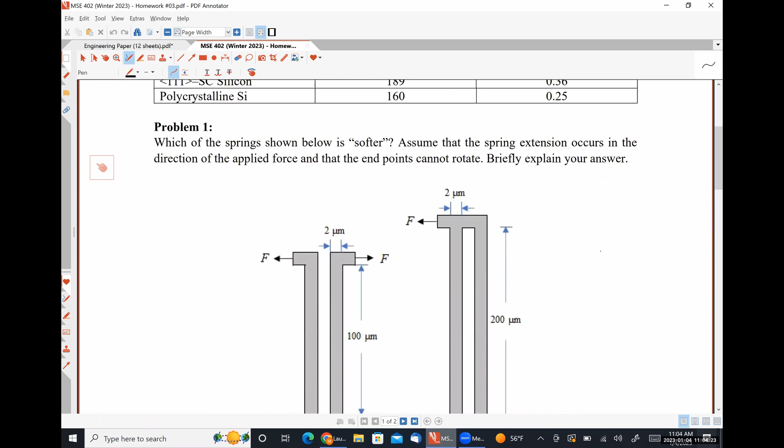Open. MSE 402. Which problem? The first one. Which of the springs is softer? Okay.

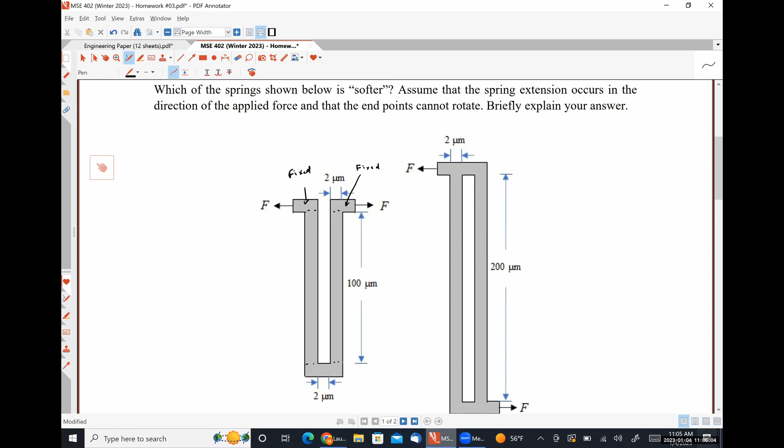So what we have here are, let me write this down. This bit right here is fixed, as is this bit, so we're assuming we have no bending there. And since this bit right here is small, let's consider this whole thing fixed as well. So we have a guided beam part over here and a guided beam part over there. Assuming everything that's thicker, let me pull out my notes for springs here so I can remember how this stuff works, because I haven't thought about it in a couple of weeks.

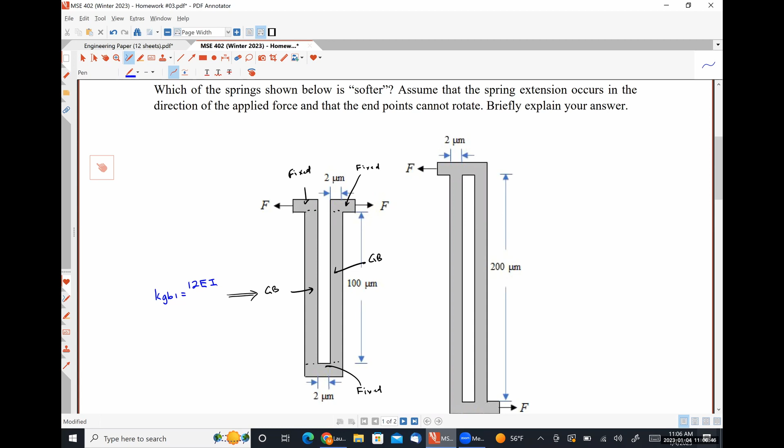Beam. So this section right here is going to have a spring constant KGB, let's just call it 1. That is going to be 12 times the Young's modulus of the material, whatever it is, times I, the moment of inertia, which is dependent effectively on the dimensions of the cross-sectional area.

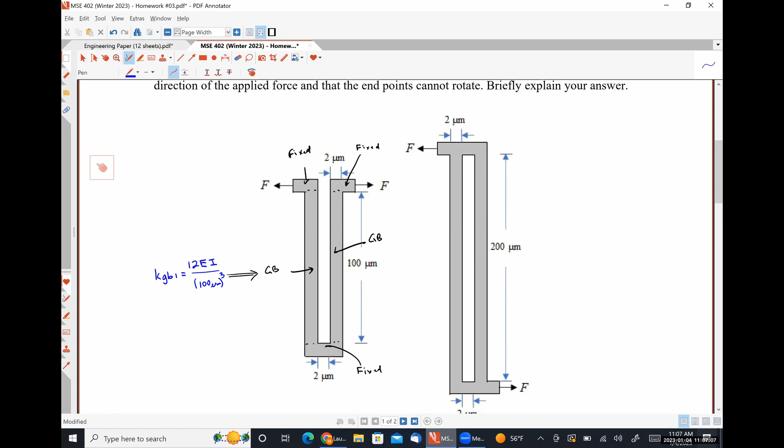So it's going to be whatever it happens to be, divided by the length here, so 100 microns cubed, right? And because we have those two in series, K for spring 1 is going to be 12 EI over 100 microns cubed, all of this times a factor of 1/2, which is going to look like 6 EI over 100 microns cubed.

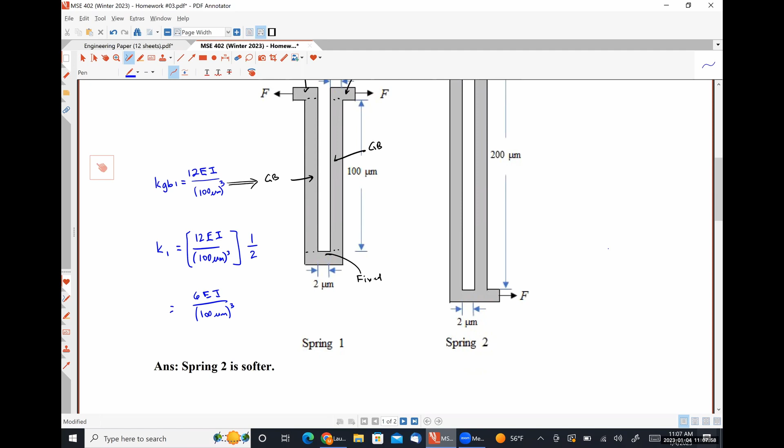Anything seem suspicious or incorrect there? So the right one will be parallel form. Right. So over here, we also have a guided beam thing.

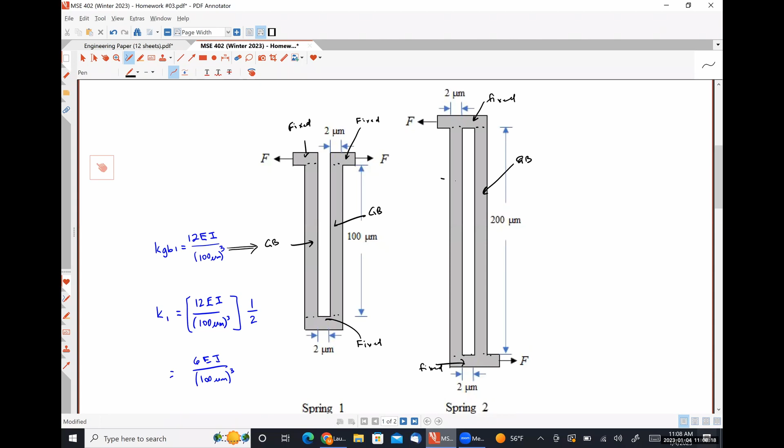So we're considering this part to be fixed, this part to be fixed, and then we have a guided beam bit there and a guided beam bit there. Let's call this KGB2.

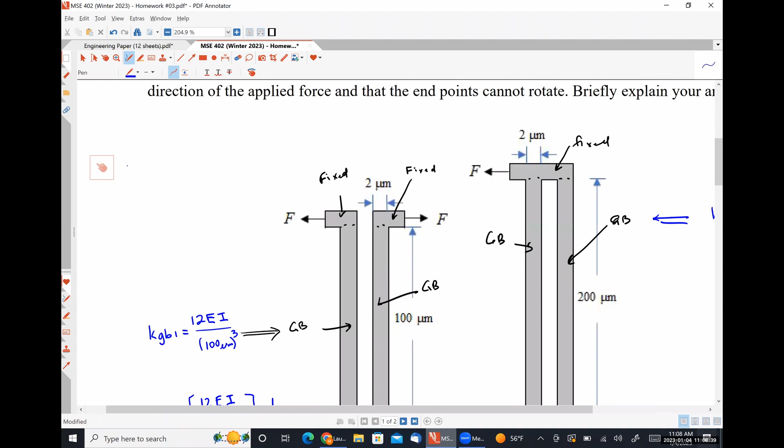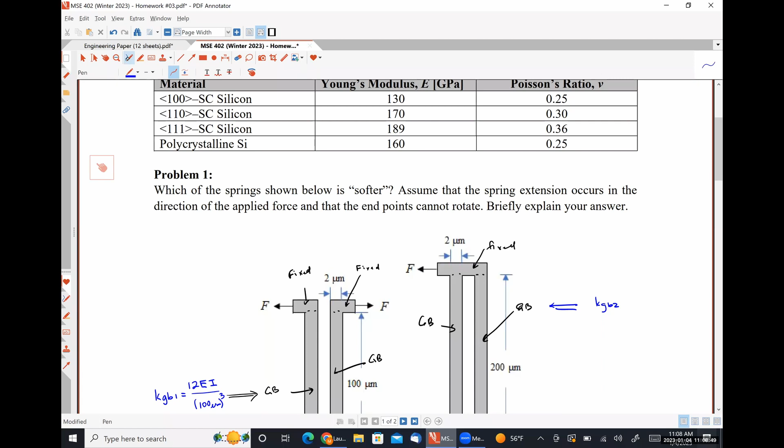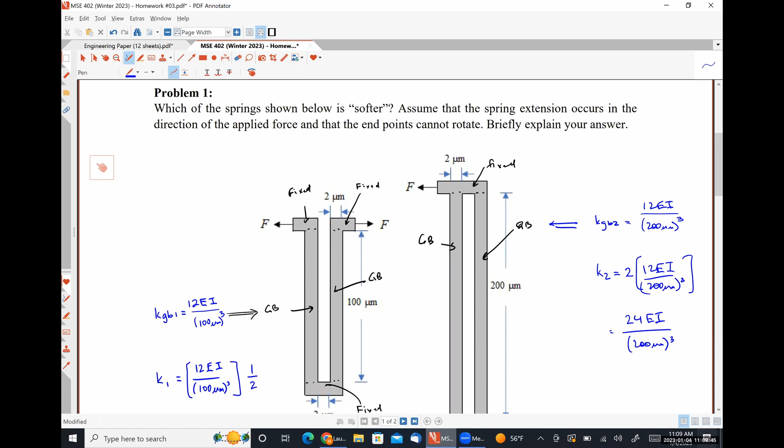Oops, sorry, hold on. This one piece is gonna have 12 EI over this length of 200 cubed. Right? And then there are two of them in parallel. So K2 is gonna be 2 times 12 EI over 200 microns cubed, or 24 EI over 200 microns cubed. And so now we need to compare these two things, right?

So let's just say, yeah, so we're gonna have 1 over 100 microns cubed compared to 4 over 200 microns cubed. Which one is going to be greater than the other? Right, because whichever one is greater is the stiffer of the two springs. Right, so that seems legit.

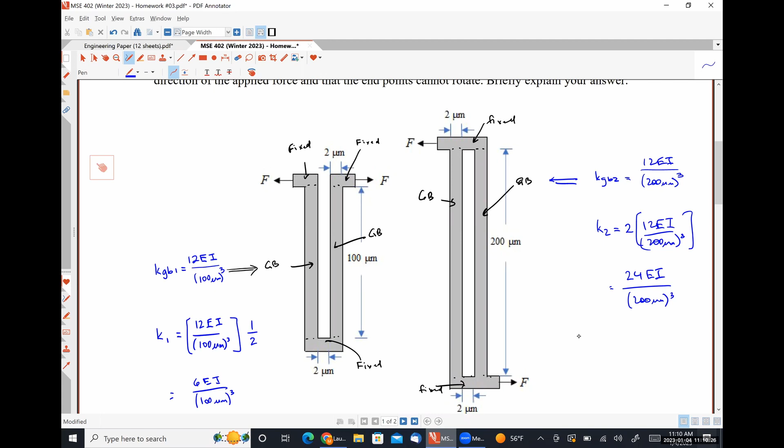For the second question, just one doubt. I have tried all the combinations for the guided beam, but it's like which length to consider, I'm like, do we have a combination of the length or only one length? So why is this picture looking, doesn't this look like this for you guys, right?

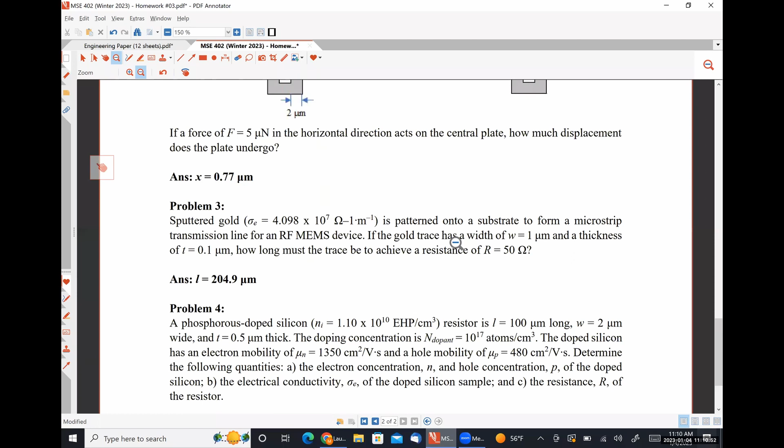Okay, so let me zoom back out. All right, so effectively for this one, between here and here, we have one guided beam spring. Between here and here, we have a second guided beam spring, and those are connected in series. Right? And then there are 4 of those connected in parallel, giving us the total spring constant of the system. That seem legit? That's how I'm looking at it anyway, as an electrical engineer. That's how I see it.

Do you have any other more problems on guided beam for our reference, like with the solution we can do on our own? I mean, I can try to find some, I just made these up.

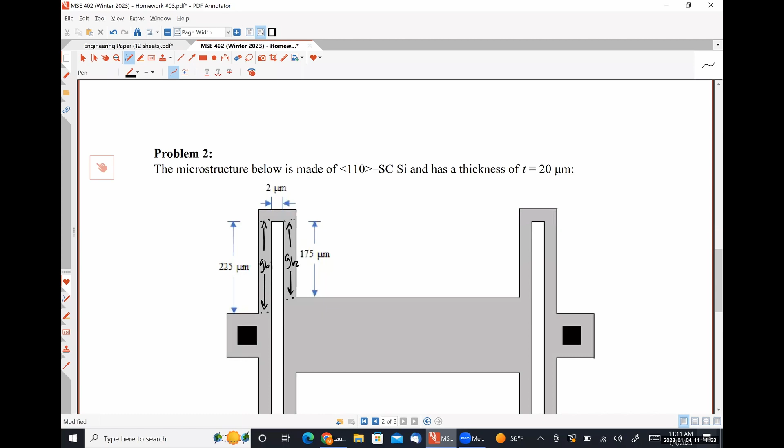But yeah, so that's how I would consider this, I'm considering it a guided beam because I know that this is an anchor point for sure. And I'm considering that this piece is so small effectively that it's not going to easily extend or bend. So whenever I'm thinking of beams as springs, I'm looking for long stretches of things. And in this case, because they have different dimensions, I consider them 2 different guided beam springs connected in series, where again, making the assumption that this part right here isn't allowed to extend or rotate or bend. And then, anything else?

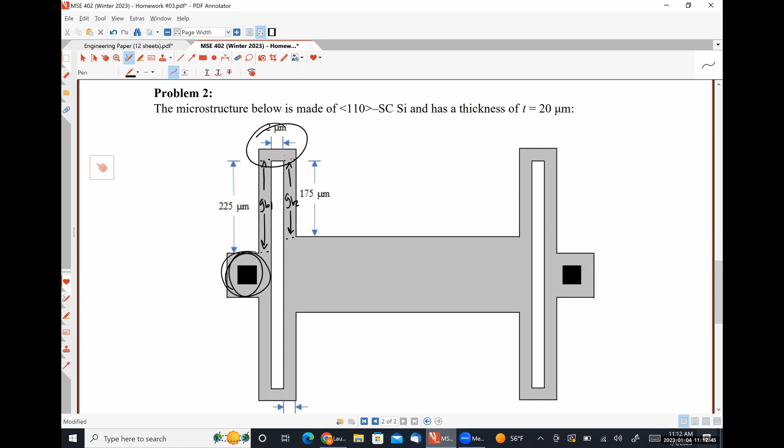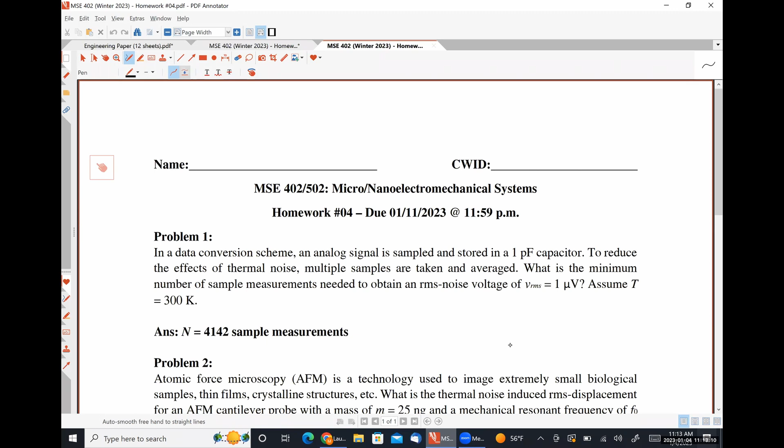For the assignment, problem 2, because RMS 1.024, that's for our Homework 4, let's look. It's been 2 weeks since I've thought about things. So you said problem 4? No, problem 2, problem 2. All right, so let me think about this here.

All right, so we have an AFM system.

We have a mass of 25 nanograms, a mechanical resonant frequency of 20 kilohertz, and we want our noise displacement.

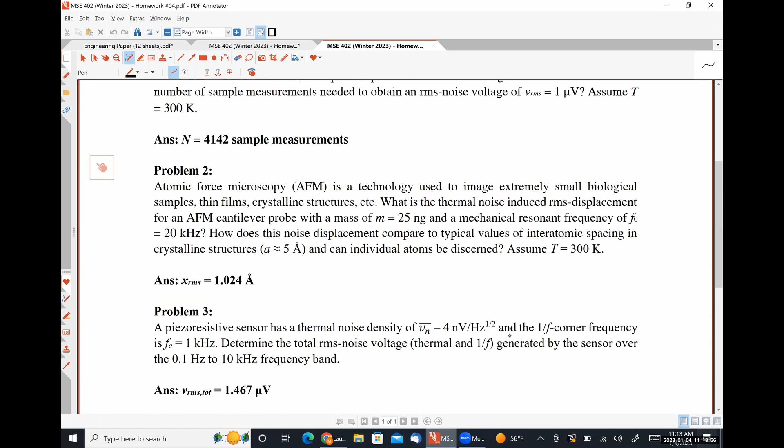So the resonant frequency omega naught is going to be 2 pi times the linear resonant frequency. And this is going to be equal to the square root of K over M, right? Or is it M over K?

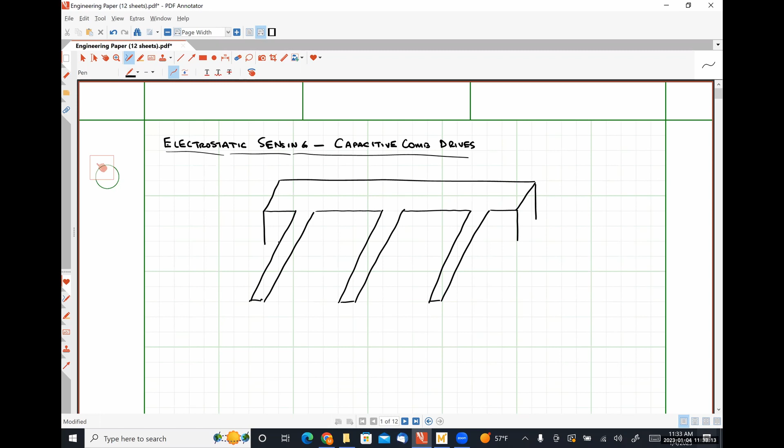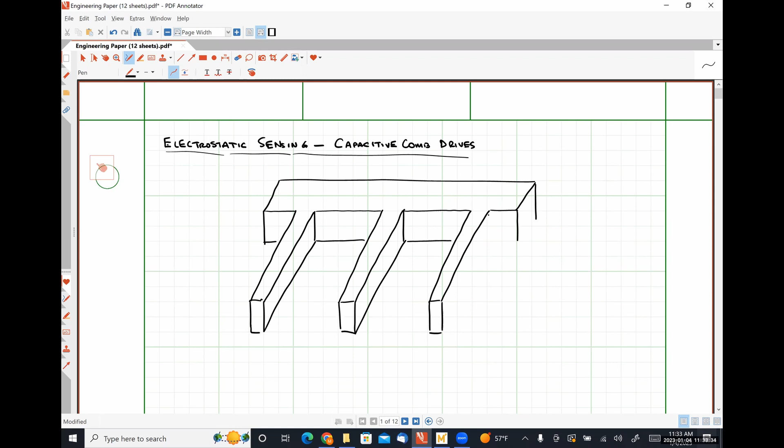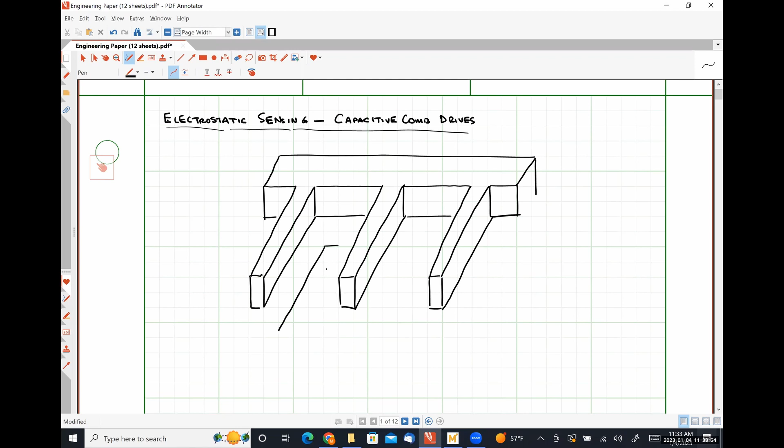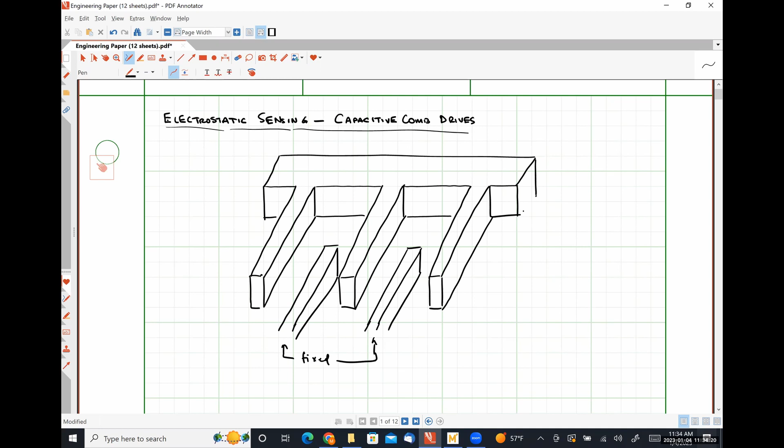All right, so we have this structure here, not quite done yet. We have a series of fingers like so, and in between these guys, let's say that these fingers on bottom are fixed, and this whole structure at the top is movable. Depending on what direction it moves, we have different things.

Let's talk our way through this briefly with some critical dimensions here. Let me do this in a different color, because if everything's in black, it's going to be even more confusing. So we have some separation between these interdigitated fingers, which I'm going to call D naught.

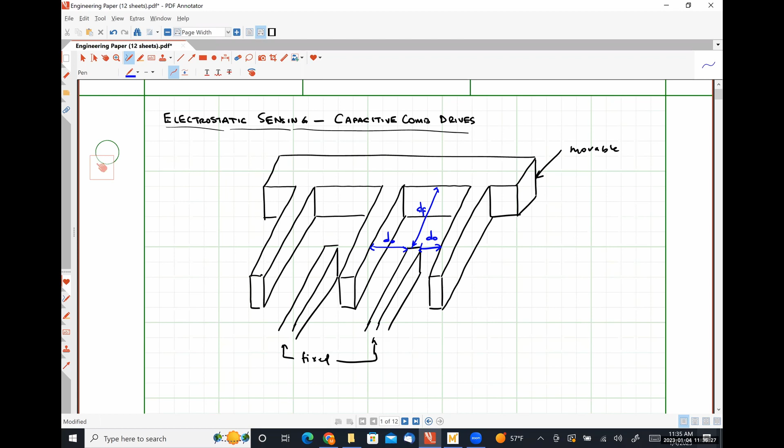Let's say that when our system is at rest, our fixed fingers are directly in the middle of the gaps of our movable fingers, like so. There is also this dimension, which I'm going to call D sub F. We'll talk about that in a moment.

We have this length, which I'm going to call L naught, which represents how much the fingers are overlapping each other. And then we have this distance T naught, that is the thickness of the fingers, where we're assuming that the fixed fingers and the movable fingers have the exact same thickness.

So this structure is composed of interdigitated fingers, more commonly called a comb drive, because it resembles a comb like you would use to comb your hair, because engineers are lazy. We have multiple different capacitances that are formed by this structure.

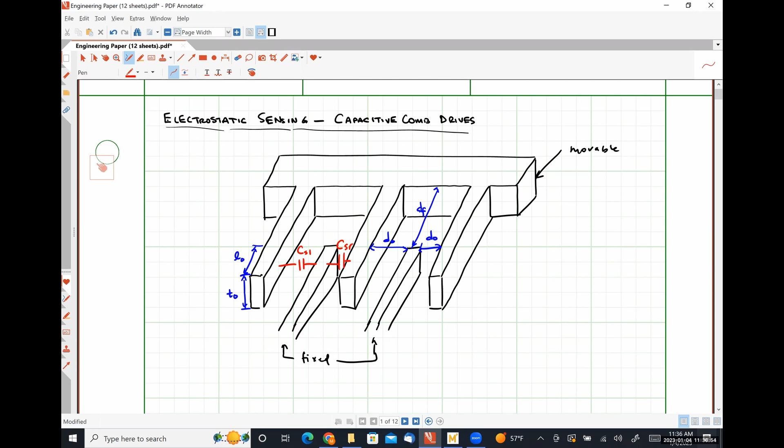For instance, there is a sidewall capacitance formed between the fixed finger and the sidewall of the movable finger to the left. I'm going to call this CSL, or capacitance, S is for sidewall and L is for left. Similarly, we're going to have a capacitance here, CSR, between our right sidewall of our fixed finger and the sidewall of the movable finger to the right.

And then we also have a capacitance here that is a fringe capacitance. We're going to talk a little bit about this fringe capacitance later on. Effectively, it is a parasitic or largely unwanted capacitance. It is very difficult to get a closed form solution for the value of this capacitance, because our parallel plate capacitor equation is really only valid for infinitely large plates, right?

Where we're neglecting some fringing capacitance. Since this fringe capacitance CF is formed by effectively a very small area overlapping something far away, our parallel plate capacitor equation isn't particularly valid there. So we would have to do something like finite element analysis, like computer simulations, in order to figure out what that fringe capacitance is.

For our derivation here, we are going to assume that distance D sub F is large, such that that fringe capacitance is small. If the area of overlap is small and the distance is large, that fringe capacitance should be small compared to our designed capacitances. So it exists, but we are going to neglect it.

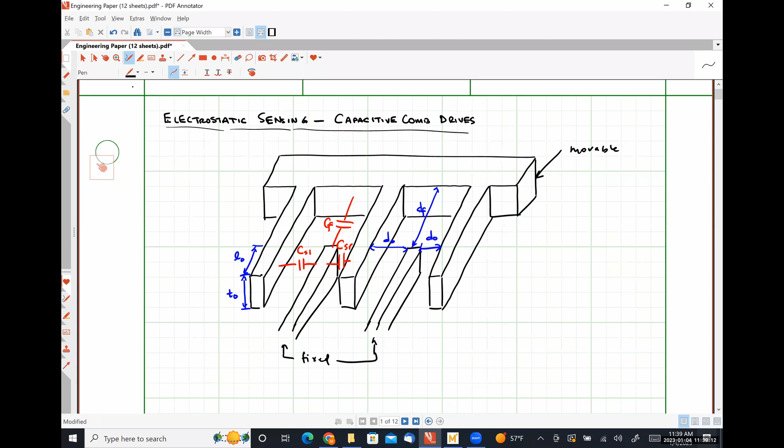Because effectively it can work as a capacitive sensor in a multitude of different ways, we are going to consider 3 different cases. Technically there's a 4th case, but I'm not going to talk about it because the math behind it is annoying. So let's talk about case number 1.

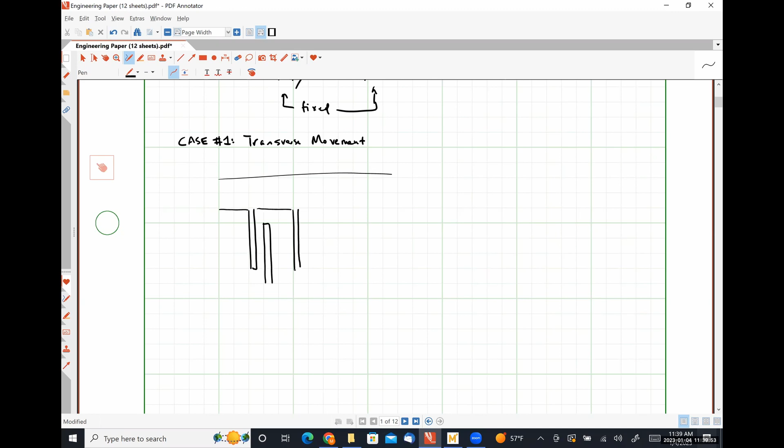Where we have transverse movement, okay? So I'm going to redraw this thing, but from a top-down perspective, pretty simplistic view here. And then I'm going to draw my fingers here, and I'm intentionally not drawing these fingers directly in the middle.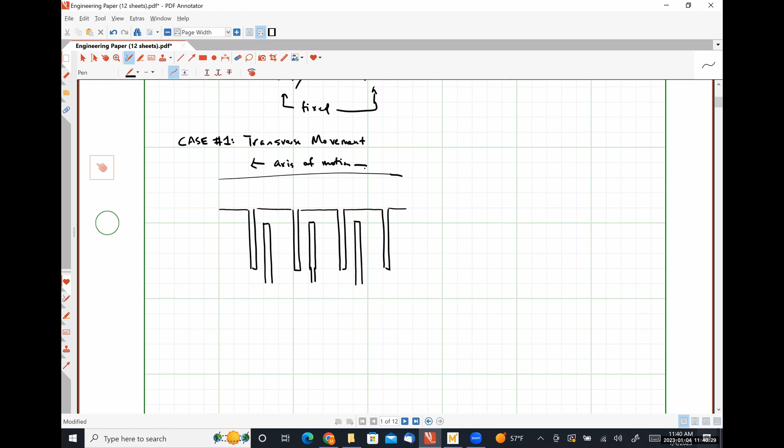Our axis of motion will be from left to right. We have some length of overlap L naught. And then here, we have some distance D naught, which is our rest position, plus X. So our movable system has moved with respect to our fixed system, such that we have a large distance between our stationary finger and the finger to the right, and a small distance here. This one will be D naught minus X, like so.

And then we have a thickness direction into the page. So just for the sake of argument, we're going to call this the Y direction, this the X direction, and our Z direction will be out of the page, okay?

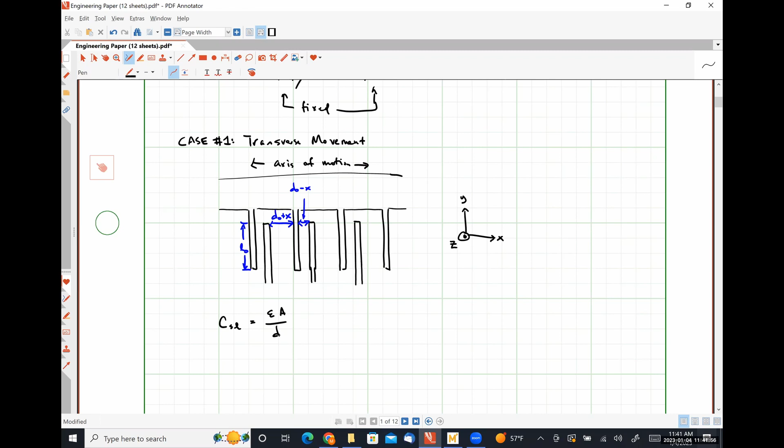So for an individual finger, the capacitance CSL will be given by epsilon times the area over the distance. That is our generic parallel plate capacitor formula. Assuming there is an air gap, this will be epsilon naught. Our area is the length L naught multiplied by the thickness T naught, divided by the distance separating our fingers, where in this case this distance is D naught minus X.

Similarly, CSR will be epsilon A over D. And so this is going to look like epsilon naught, L naught, T naught over D naught plus X.

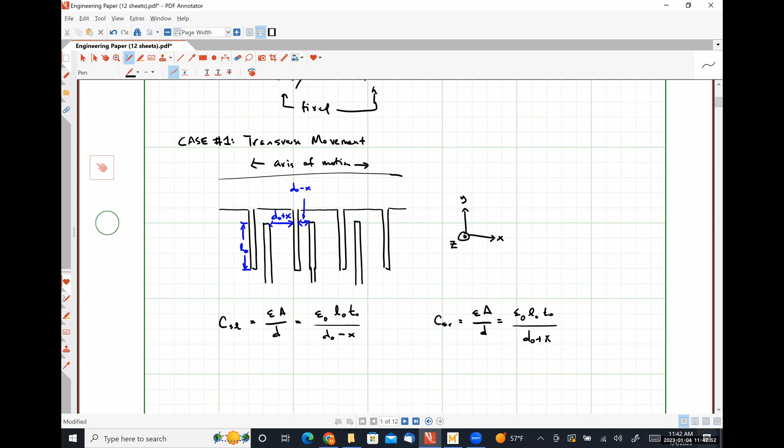Our total capacitance is going to be N times CSL plus CSR, because the number of fingers is going to increase our overall capacitance, since these are going to be effectively connected directly in parallel with each other. So if our movable structure is at one potential and all of our anchored fingers are at a different potential, all of those capacitors formed are connected electrically in parallel with each other.

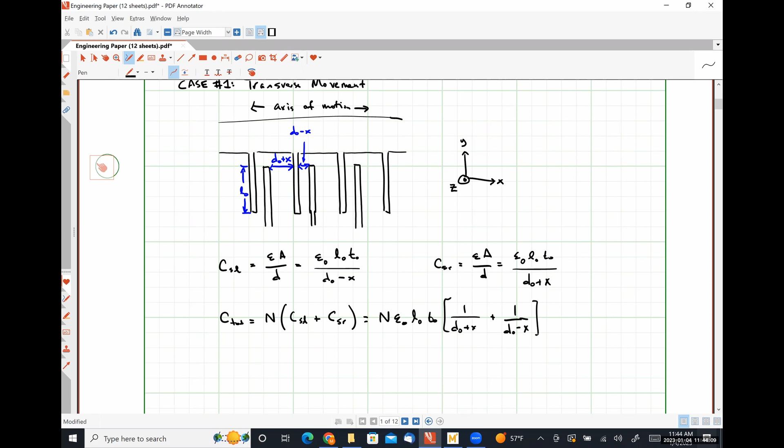And so this gives us an overall capacitance of N epsilon naught L naught T naught times a factor of 1 over D naught plus X plus 1 over D naught minus X. And we can also define what's called a sensitivity.

This is the change in capacitance with respect to the change in displacement. And I'm not going to force you guys to do the derivative. It's going to be 1 over D naught minus X quantity squared, minus 1 over D naught plus X quantity squared.

So from this, we can actually see a couple of advantages we might have by using this type of structure over a simple plate moving into or out of the axis. This is a surface micro machine process inherently, which means it's largely compatible with CMOS processes. We're just doing everything on top of an already established wafer, so we can easily integrate other circuitry with a structure like this.

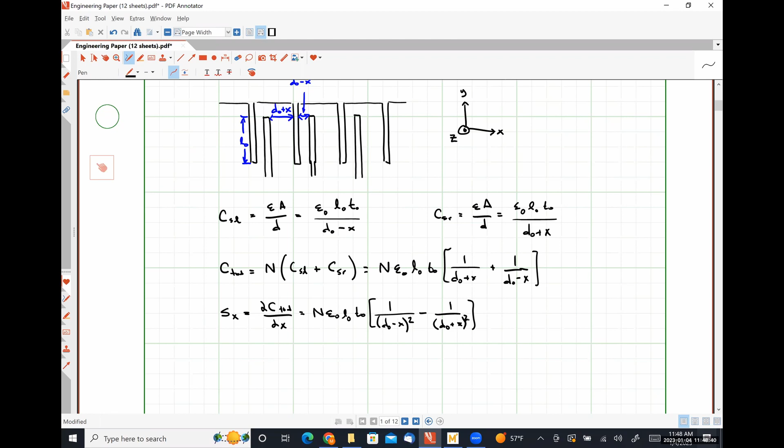Now let's talk about how we can actually do area tuning with a system, okay? So our second case is going to be lateral movement.

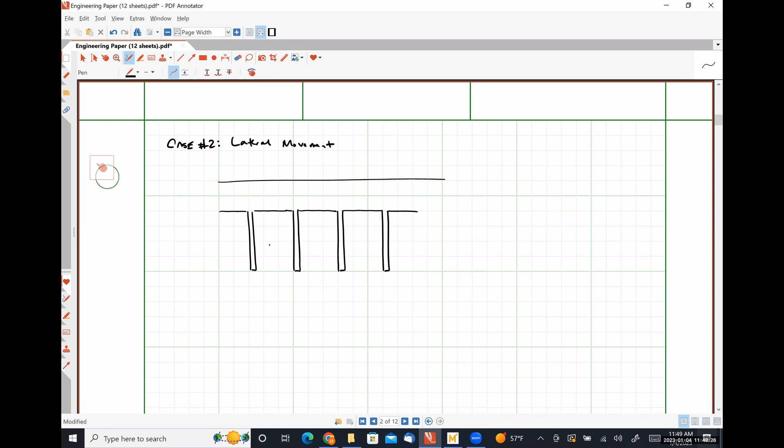So we have our exact same structure. Let's say that our fingers are directly in the middle. If this was our dimension L naught, we now have some small change here, y. So we've changed the distance by which our fingers are moved into the gaps. These distances are now d naught.

And for our coordinate system, here's the y direction. Z direction is out of the page, X direction is to the right, and our axis of motion is like so.

So we still are going to have some sidewall capacitance CSL and some sidewall capacitance CSR, but now instead of changing due to a change in the D dimension, we're having an effective change in the area, right? So in this case, CSL and CSR are going to be the exact same thing, and that is going to be epsilon A over D, which is going to look like epsilon naught. Since our length dimension is the one that's changing, this is going to look like L naught minus Y times T naught over our gap D naught.

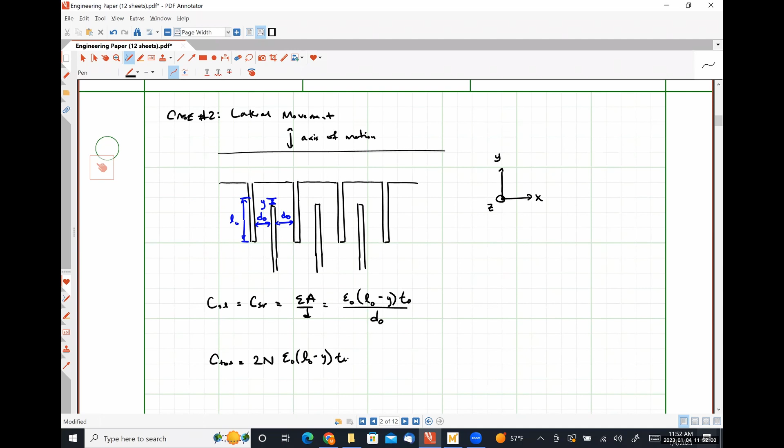And so our total capacitance is going to be twice N times any of those single capacitances. And we will have some sensitivity to a displacement in the y direction, since this is going to be the derivative of C total with respect to y. And this is a simple linear relationship, right? So this is going to be 2N epsilon naught T naught over D naught.

So that means effectively that if we change the overlap, so if our displacement is, let's say, 20% of the length L naught, our change in capacitance is 20%. We don't really have to do a whole heck of a lot of figuring things out. That simple linear relationship means that we get a 1-to-1 tuning ratio there. So that is lateral movement.

So what do you think is our other option? So rotational is the one that we're not going to do because it's a pain in the butt. Along the z-axis. Exactly right. Movement along the z-axis, because that is also going to cause a change in the area. Yeah, so we're just going to change Y to Z. Pretty similarly, yep. Nope.

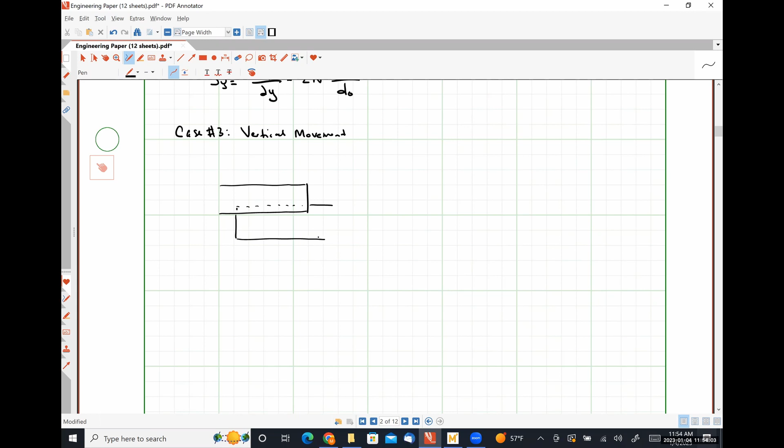And this is our movable finger, so let's write that down. Stationary, movable. Let's establish our coordinate system. This is the z-axis, this is the y-axis, this is the x-axis.

Our distance L naught is constant, our distance D naught is constant. And this was T naught. And this changes with Z.

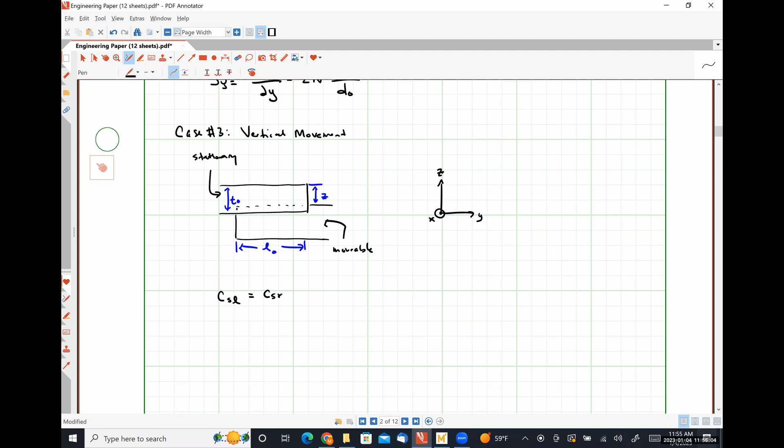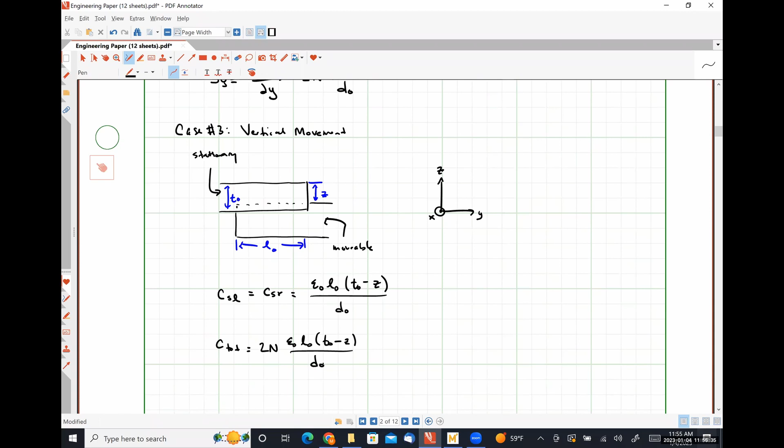So once again, we should observe that CSL will be equal to CSR. And this is going to be epsilon naught, L naught, T naught minus Z, divided by D naught. Our total capacitance is then 2N times epsilon naught, L naught, T naught minus Z over D naught, and our displacement sensitivity is the derivative of the total capacitance with respect to displacement in the Z direction. And this is going to be a simple number effectively over D naught.

Really, this should have a minus sign, and the other one should as well, but why can't Z be a negative number, right? Why can't they? Actually, I take that back. This one has to be negative by definition, because it's impossible to increase the area of overlap between the plates if the plates are the same thickness. It can either be fully overlapped or not. And if it's not fully overlapped, then obviously the change in capacitance is going to be a decrease in capacitance.

And then, as Sam pointed out, there's technically a fourth option, which would be a torsional thing. That is also going to be an area change, but mathematically describing that is a huge pain, so I'm not going to do it. If you have two plates that start out fully overlapped, and then one rotates out of plane with the other, the area of overlap changes significantly, so you can get a very large change in capacitance. But mathematically describing that is very difficult because it's not a one-dimensional change, it's a two-dimensional change. So I'm not going to try to mathematically describe it.

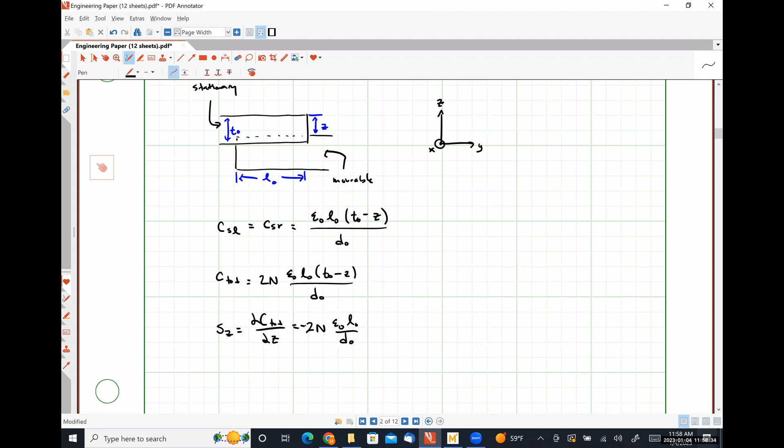So please remind me, did we talk about ratiometric capacitance measurement before the break? Particularly like a Wheatstone bridge kind of thing? Yes. Right, okay. So, yeah.

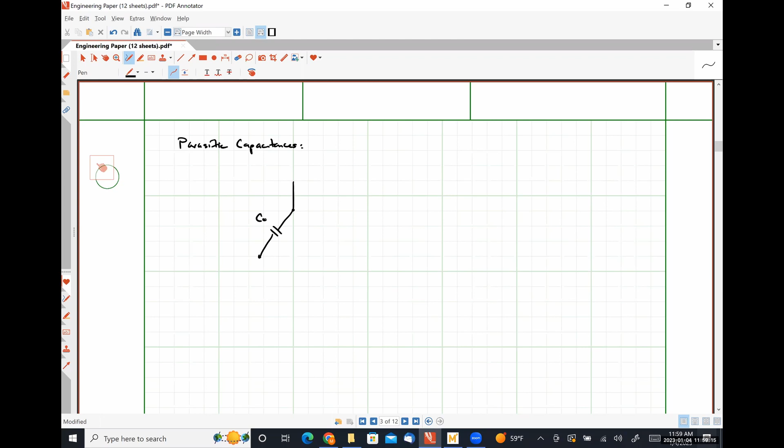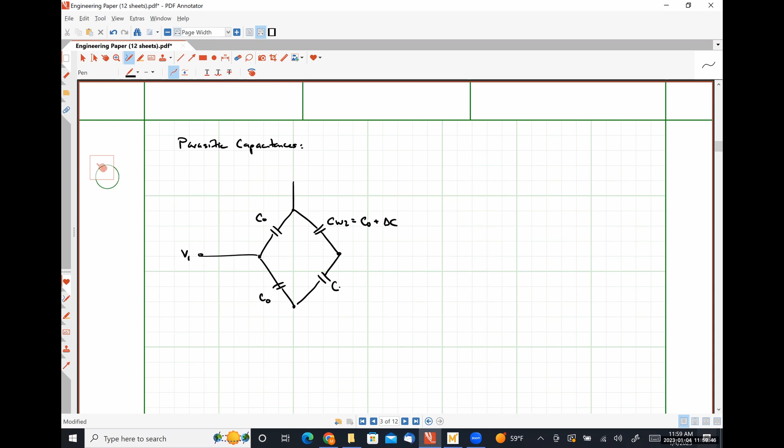So let's say that we have a Wheatstone bridge configuration, like so, where we have a reference capacitor here, a reference capacitor here. This is our voltage V1. And then we have something over here, like so. This is a capacitance, let's call this our work capacitance CW2, that is C naught plus delta C. And this is our work capacitance CW1, that is C naught minus delta C. There's our ground. And over here is our voltage V2.

This is our input voltage V, and I believe we found out that our output voltage, which is defined as V2 minus V1, is just going to be delta C over 2 C naught, if I'm not mistaken.

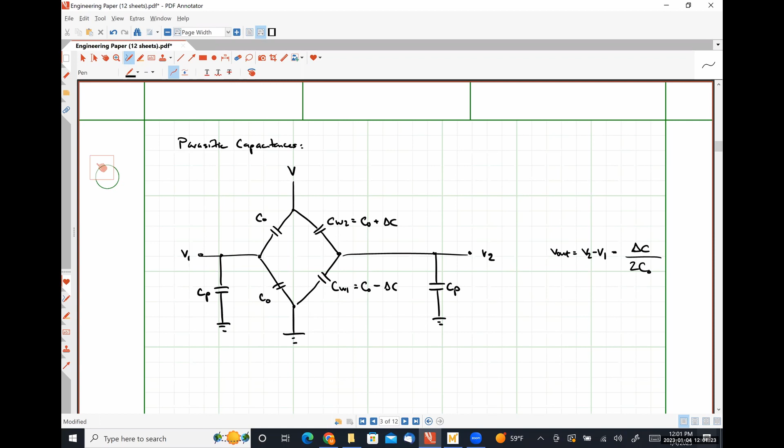So what if we had parasitic capacitances, like our fringe capacitance and things like that? How is that going to influence things? Let's say that we are able to effectively shield and ground our fringe capacitance such that there's going to be some capacitance CP here between where we're measuring our voltage V1 and ground, and here where we're measuring our voltage V2 and ground. How does this change the output of our system, right?

Yeah, the V at the top. Yeah, I forgot that. No, that's fair, absolutely fair.

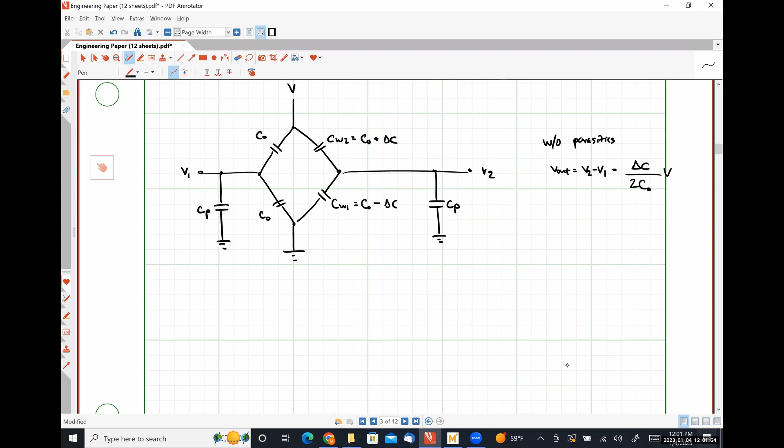So in this case, V1 is going to be V times, so we're going to have C naught plus CP, divided by 2 C naught plus CP, just using voltage division.

V2 is going to be V times C naught minus delta C plus CP. Let me put my V out front before I forget it again. Then I'm going to have C naught plus delta C plus C naught minus delta C, so it looks like twice C naught plus CP again.

And from this, V out, V2 minus V1, is going to look like V times, in this case, minus delta C over 2 C naught plus CP. I could have made that a plus sign by putting my reference capacitance at the top instead, with a minus sign and all that kind of stuff. The sign isn't particularly important there.

The effect of the parasitic capacitance is what matters. So what is the parasitic capacitance doing here? It's making the denominator larger, which is making the relative change in capacitance effectively smaller, so it's decreasing our sensitivity. The presence of parasitic capacitance is one of the biggest drawbacks of electrostatic or capacitive sensing, because effectively any two electrical conductors form a capacitance.

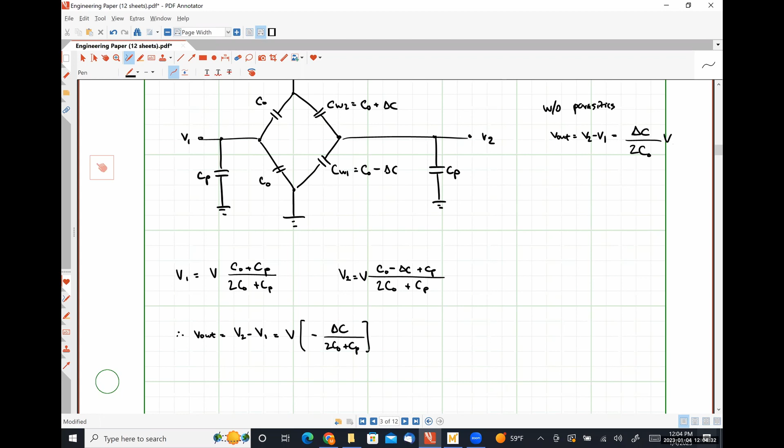So with the surface micromachine structures that we're looking at here, what do you think the biggest parasitic capacitance is? We have a surface micromachine structure, and it is literally sitting on top of an electrically conductive substrate. So there's going to be a large bottom plate capacitance effectively that we have to worry about.

So we want a trench underneath our microstructure, so that the distance between the substrate and the proof mass portion of our structure is as large as possible. That will minimize that parasitic capacitance. Anyway.

Alongside the circuitry, right? But circuitry is usually two-dimensional, so a surface micromachine structure is integratable with CMOS processes because you can do it effectively on top. You would do all of your processing for your electronics and stuff like that, and then you would have area on your chip dedicated to MEMS devices, and use sacrificial layers to effectively build something on top of that structure.

So you wouldn't do bulk micromachining where you're doing deep chemical etches and all of that kind of stuff, because the area of that can eat into your IC area. But surface micromachining is literally sputtering and deposition of thin films, patterning them on top of your pre-existing electronics and all of that kind of stuff to make your microstructure.